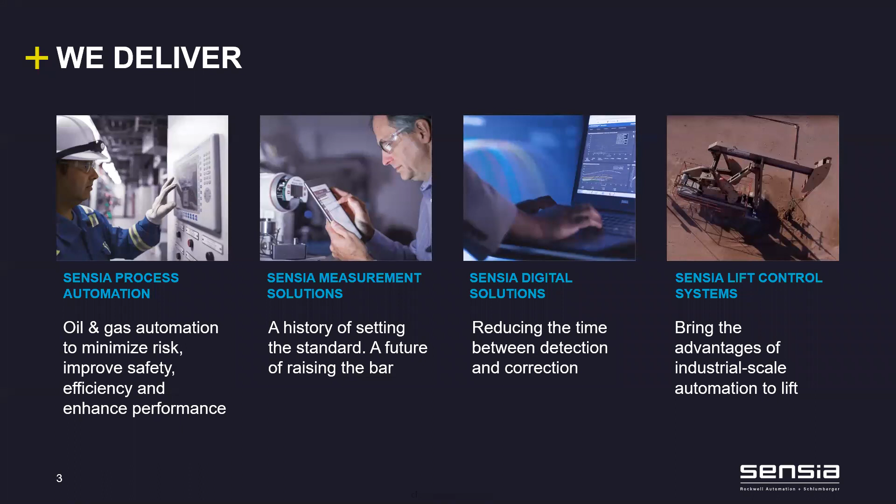So what we are going to cover in today's agenda, which is approximately 60 minutes, but we would try to condense it down to, let's say, 40-45 minutes to take your questions. We'll start with the ESP automation and health management, like how do you know your ESP functionality is going well? So from the electrical signature, we'll take a look initially, and then gradually we'll focus our ESP to prioritize based on those symptoms. It's just like an analogy of a person.

If you go for a diagnostic to a doctor, he first checks your physical attributes, your pathology attributes, and then tries to understand what kind of issue that is, and later on prioritizes. So we'll look at the prioritization. How do we diagnose and prioritize? Then what are the electrical signatures? How can we take the electrical signature of our equipment, not very sophisticated equipment downhole, maybe from the surface, whatever we have, it can be a variable speed drive, it can be a pump frequency or a speed, and how that can lead to an interpretation for event detection.

And gradually we will go to artificial intelligence. Well, predictive model analysis and control action can be taken for that specific ESP in order to avoid failures such as the ESP itself, or gas lock issues, or pump off issues, or maybe some of the sand production issues which you have. And finally, I'll talk a little bit about this new digital twin. It's a fancy word, but we would try to give you some perspective how digital twin can play a very vital role in these AiRP solutions. And finally, we'll take some of your questions and answers.

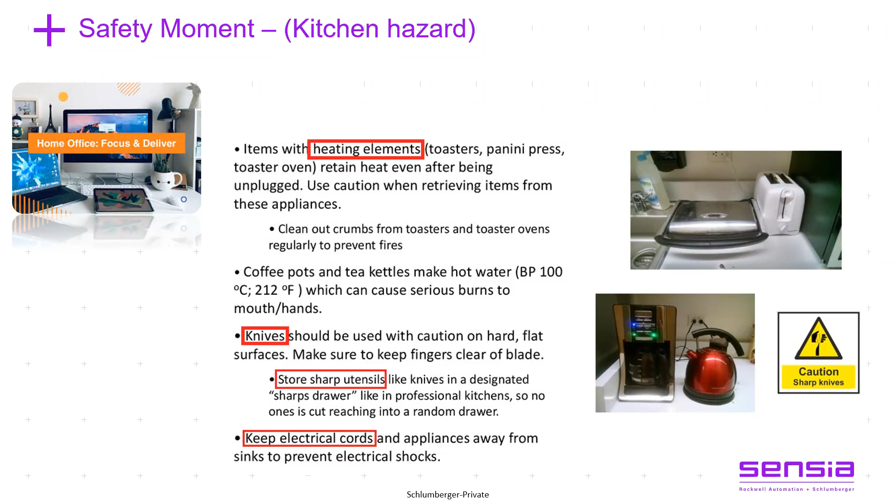And now we will shift our focus to today's topic, which is AiRP for ESP automation and its health management, right? So first of all, what we did is we split into two themes, right? And these themes are based on the electrical signature or automatic event detection. We call it AED. That comes through the equipment itself. And some of those also come from the reservoir or the well behavior, right? So when you go for ESP optimization, you look at the physical piece, which is the equipment, and then you look at the holistic piece, which is your nature, which is the reservoir. So the challenges which we got, the reservoir challenges are basically sand and scale production, and then pump wear and tear.

And the physical challenge on the equipment side is managing the alarms, because in a practical world, when we are running an equipment and that equipment is giving you hundreds and hundreds of alarms, somebody needs to see it, somebody needs to manage it. And more importantly, after seeing and managing, that person should come out with some decision.

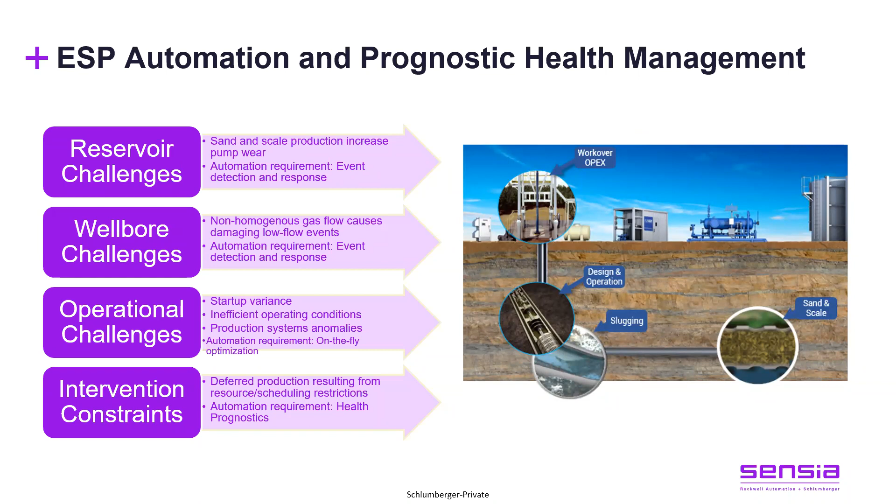I'm giving you a very vague example or a simplified example to make you understand. Then maybe I have, let's say, an increase in temperature and vibration leading to a sand problem. So then the mitigation measure would automatically come to slow down your pump speed. So these are the attributes we get overall from this topic.

Now, let's see how prioritization takes place today, right? In all these ESP wells, including in Indonesia. And then we will see how we can improve from today to tomorrow, right? So today, the ability to prioritize the relative importance of events lies in people, not in a program. And that is where we have a slow loop system, where it is hit or miss because it's run by a field engineer and they can see the event. But as the number of events increases, it is relatively difficult for that field engineer to qualify and quickly take action to be able to protect your ESP and production.

It goes down to a data surveillance center where you have production guys sitting, operation guys sitting, and they would take a look at it, typically 2 to 3 or 4 guys depending on how many wells, and then they decide it. And this is not a very efficient way of doing things, especially in today's time when you really need some intelligence to tell you what are your prioritized wells, because you don't want to focus on 100 wells.

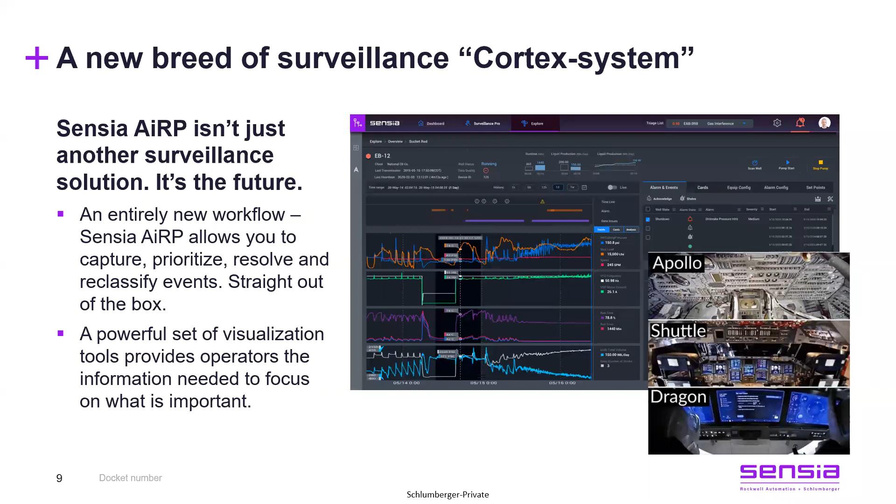And the maintenance of the ESP is also something you need to consider. If your ESP fails, it's not only the ESP cost, but the maintenance cost, the guy who is traveling to the site to replace that—that's also something very important.

So the challenges it addresses is basically production optimization to reduce your expenditure for ESP failure. You can scale up—today you're using 10 ESP, you can easily go all the way up to 1000 ESP, no problem. This system is an absolutely scalable system.

The most important thing is domain expertise. And that is why Schlumberger comes into picture, because you know how much experience Schlumberger has in both the physical piece of ESP as well as the surveillance piece of the ESP.

So that is why with the SCADA system, if you look at it, either it will make or break. Like if anything happens, the SCADA system will shut down. But in ESP, can you afford to shut down? No, because you need to run that to maintain your production. So that is where you cannot use a conventional SCADA system for an exclusive petroleum domain expertise ESP platform like this. So that is why we are different.

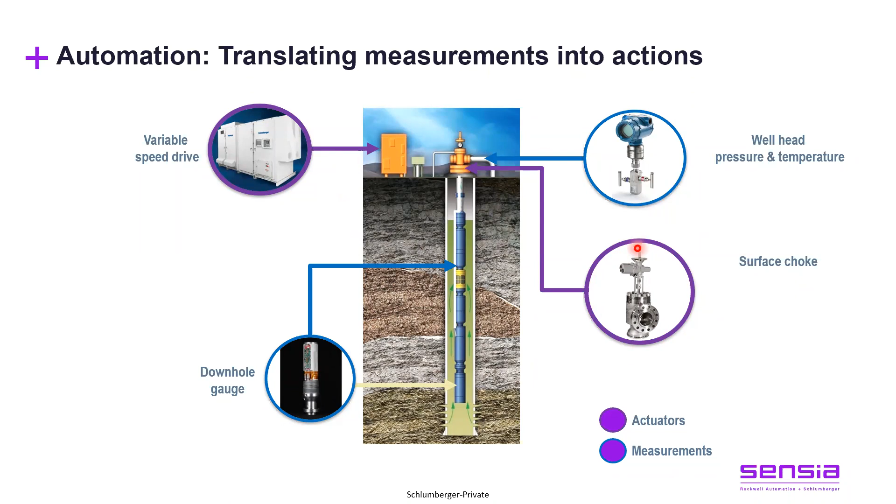Now we'll deep dive into electrical signature analysis, because this is important, how critical electrical signatures are. Believe it or not, these electrical signatures have already been there in the ESP platform for many years, but nobody really took the pain to get this data and make decisions from it. So the AiRP platform actually does this for the first time. What we're doing is performing signal processing in both frequency and time domain. Remember, we have all this data - variable speed drive data, vibration data - all timestamped. So we've done the fast Fourier transform, FFT, a mathematical function, to obtain the signature of interest. You can have multiple signatures: frequency increasing, speed decreasing. But what's important is to obtain the signature of interest and other derived parameters useful for condition monitoring.

Condition monitoring of the process coming out, in this case, can be your hydrocarbon production. Also condition monitoring of the equipment, such as vibration - if the pump is vibrating much, as you can see it increasing, what does it mean? Either it has a throttling impact, or more sand production, or something that's not smooth. So you validate that with the amplitude modulation of the current coming in. If you see there is vibration, and the peak-to-peak voltage is quite significant, you cross-check that back with your current, and you see current drawing up when vibration is increasing, and current dropping once vibration drops. That validates all this happening in the background automatically. Then you detect it and take mitigation measures, and this can be applied to many problems - not just vibration, this could be sand, this could be gas lock.

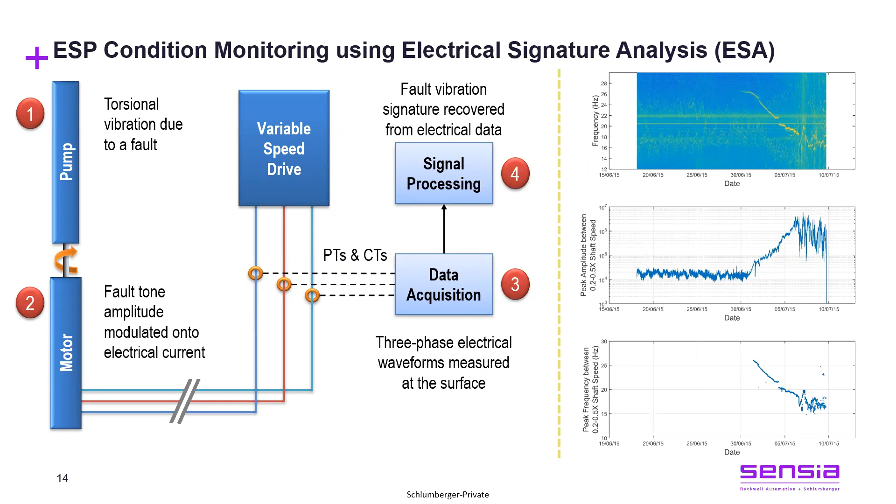Now you detect the event. Now how do you take action? All this is fine. Now you understand, we detect the event, we have so many problems, we know all the problems. What action the system takes, how it can help those guys sitting in the production surveillance and complement them.

The automatic event detection system, or AED engine, begins by considering real-time data from the field. It captures all the real-time data: pump, pressure, temperature, vibration, speed from the VSD, etc. It analyzes whether this is due to bad lubrication, heat rise, or vibration. What makes the system unique is its ability to understand the physical property of the system. Initially, the engine considers the quality of the data which is received.

That quality validation I have shown you in the previous slide. How do you validate there is a vibration? There are multiple checks it is doing to validate that condition. Then the engine can discriminate whether variability is due to transmission noise, because sometimes you might have noise from a three-phase connection. It could have several other issues coming downhole, or physical fluctuations such as gas production.

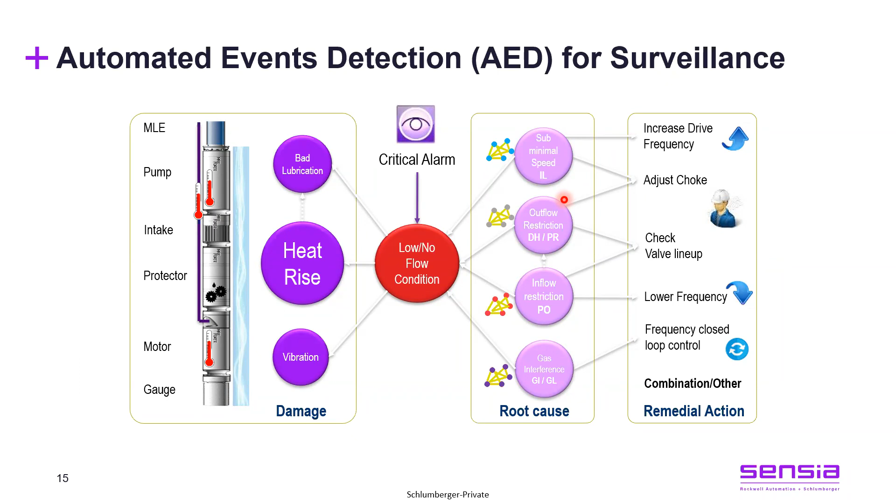It adjusts the choke depending on whether it's a sand issue or a gas lock issue. It checks the valve lineup, or vice versa, as I said, increase or decrease frequency. The remedial action is already there. By the time the guy really comes out for some other action, the system itself avoids the pump failure. So that is the beauty of the automatic event detection system, the action which is taken.

Now we have seen different scenarios. Let's shift our focus to pump off and recovery, right? So applying the previous startup practice, what we do is we ramp up our pump initially, let's say up to 50, 51 hertz, okay? A pump off condition was then raised, right? This is a live example from one of our sites, by the way.

So if you see, we started smoothly and then raised to 51 hertz, and a pump off condition was raised to the system. And then the AED engine detects it. The automation began to take appropriate action to decrease the speed. So if you see, the speed of the pump initially increased and then slowly it is being decreased, to adjust the choke, to close the choke until the severity started dropping.

Eventually that eliminates the event, because if you drop the speed and close the choke, then ultimately you are not running at 51 hertz. Ultimately that is going to come and stabilize. And this is how you actually avoid pump off, which is a very severe cause of your ESP failure. ESP doesn't fail when it's running. ESP often fails once you start up. That is where ESP fails.

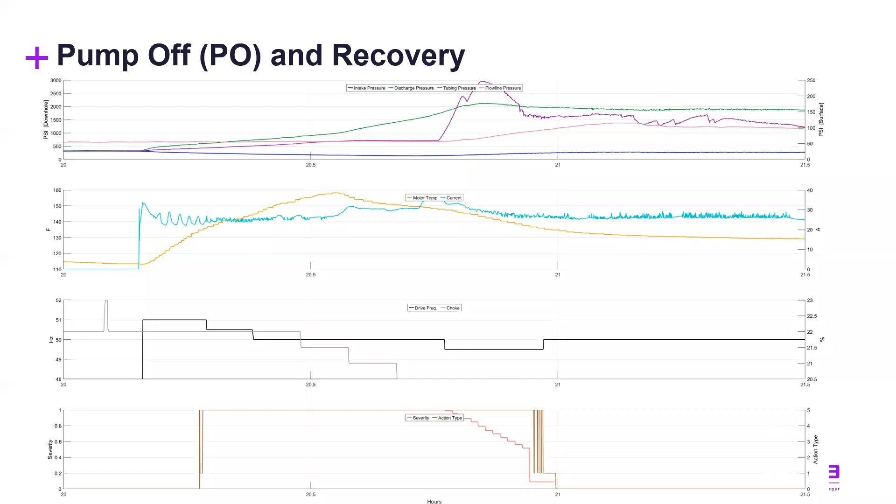Then another issue, insufficient lift. This can happen in low flowing wells, especially depleting wells, low pressure wells, tight reservoirs, sometimes heavy oil. This is a very common cause for those kinds of wells. So how does the engine respond? Let's see. So we are in the process of an action of walk back. What is walk back? It means it takes a small step towards the target set point.

So let's say you have a target production limit, or at this speed, if you run the pump, you have the optimum production. In the process of that, a brief insufficient lift was triggered, and that could be due to the motor temperature. It could be due to various reasons down in the subsurface, right? And the walk back was disabled, followed by the event recovery action. How do you manage that? Either you manage it by increased frequency or by a step.

Now, as you know, there is insufficient lift. Instead of a long wait, or an alarm being triggered and somebody telling you what to do, the system works by itself. So how does it work? First of all, if you see, this is your baseline, the green is the baseline at which you should be producing. And then suddenly you start up and you see your production is not as per the baseline, it is depleting. Ideally, this can create serious issues, from a production perspective, from the pump perspective, and a maintenance perspective.

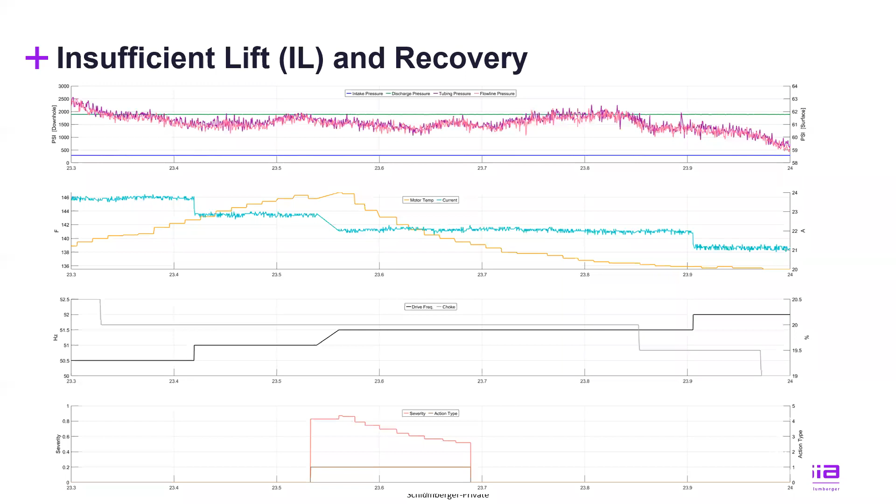So this is the scenario in case of insufficient lift and recovery in a real-time example, the screenshot which was given to me. Startup, which is another highest risk of ESP failure, which we just discussed. Here, two things are very important. Time to detect that startup.

So x-axis is your time in minutes and y-axis is your frequency. The same thing we are checking with choke and the same thing we are checking with current. Remember the data analogy, we don't rely on one set of parameters. We have to cross check with the other set of parameters to make a correlation, right? So what is happening here? How do we avoid a startup failure of an ESP?

So first of all, currently the challenge is it's a very manual process. Okay, we detect and check it and then we react. And that reaction time can vary significantly from 5 minutes, 10 minutes to hours to sometimes several hours, right? So fast reaction time is very important because as you rightly said, ESPs fail during startup the most, 80 to

90%. So we need to detect any anomaly within minutes to avoid ESP failure and potential permanent damage to the ESP, right? Because this is where your permanent magnetic motor gets hit, right? And then surface operation constraints, reservoir related issues, and finally and most importantly, can we devise a startup process that protects both the well and the ESP, because it's not only the ESP, sometimes it's related to the well.

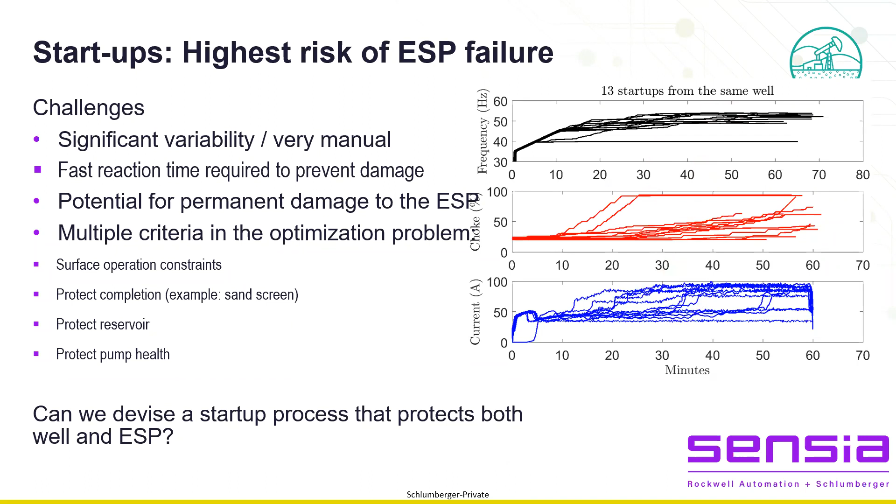Okay, so how do you do that? So first of all, you need to ensure you detect it within a certain time frame. You cannot afford to allow the ESP to run for a certain time and then all of a sudden it fails, right? And then the electrical signature, the harmonics, is coming. So let's take a deep dive into how automation using model prediction can avoid such high risk ESP failure during startup. So this is the model prediction, which we call MPC, model predictive control.

So this is an action coming from the artificial intelligence tool, which is a physics-based model, and it has a combination of a mathematical model as well, right? Which not only predicts, but also gives you control capability to maneuver that dangerous period of startup. Okay, the capability of allowing control to multiple constraints using models such as digital twin. You can apply it to many problems, not only to startup.

So the MPC finds the operational control action from the model, that is a multi-input, multi-output system, which is reinforced by machine learning. So what is happening? Let's take a look into it. So the first curve is the pump speed, and the second curve is for the choke opening. Okay, I have to apologize again for my granular graph. I should have increased the size of the graph.

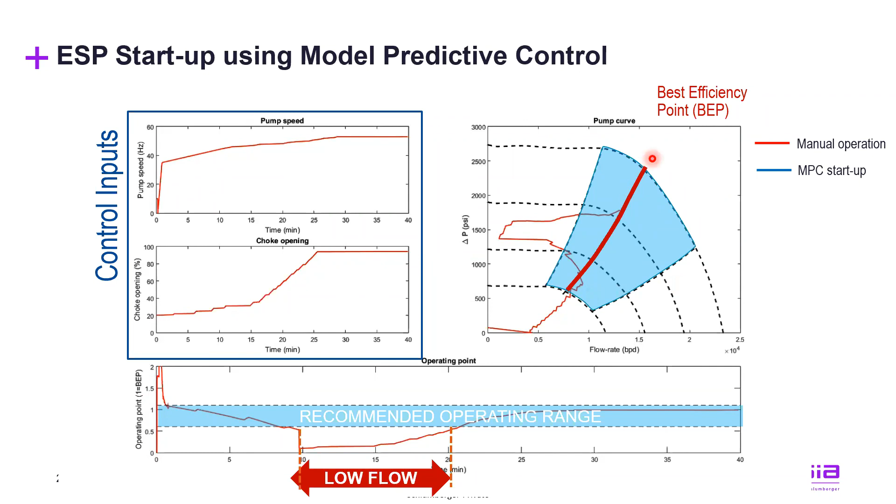Or for any pump manufacturer, you need to have this best efficiency point. So all you do is controlling that action and minimize your pump off situation or your overspeed situation or gas lock situation. That is where the recommended operating range for MPC startup is coming into picture. Whereas for manual, it is virtually impossible to take action within short time, right?

This is again another MPC for ESP startup where you can see it's been stabilizing fast. One of the things is controlling BEP. Another thing is stabilizing fast. The stabilizing fast is achieved because you know all the surface parameters. You could tune your speed and choke to meet it fast. Okay, so in a way you are directing the ESP saying this is where you should be at.

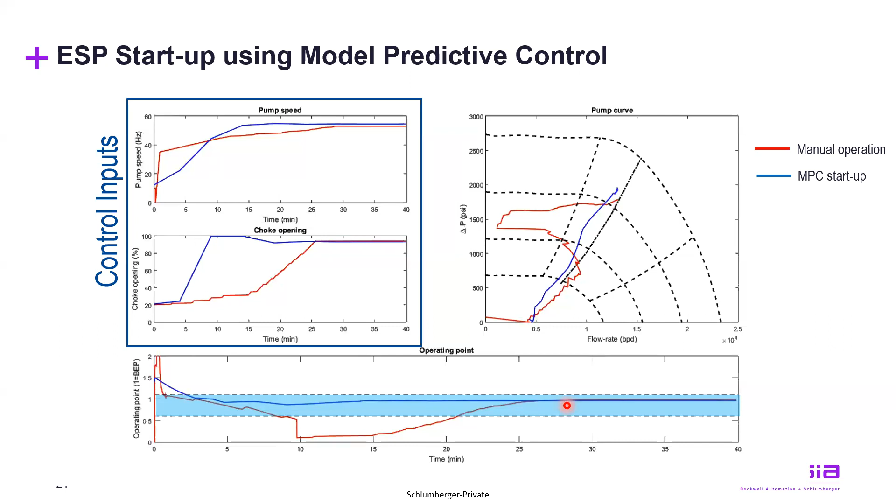Imagine if you don't have any direction, the ESP will behave whatever it wants to be. So in a way, the MPC acts as a target set point for your pump to behave. So that way you could not only achieve your production, but also achieve enhanced pump life. Because if you are not overrunning the pump, if you are not overspeeding the pump, and if you are facing sand issues, gas lock issues, and successfully mitigating that, what you are doing? You are increasing the pump life. If you are increasing the pump life, that is giving you production and also less workover and maintenance.

Now, the KPI can be different to different customers. And believe it or not, many countries have different perspectives. Some countries see electrical power as a major issue. For example, Australia. They see electrical power as very, very critical, to minimize ESP consumption, right? Because availability of power in some of the remote sites is minimal. Some customers see maximizing production as the most important criteria. And some customers, or in fact most customers, would like to protect the ESP from failure, from maintenance, okay?

So the MPC is more than a basic closed loop control. What it does, basically, you can fine tune your preference and the triangle and make it as per your wish. Like if you want the MPC to focus on production, it will focus on production, but at the same time keep an eye on your ESP failures and control performance. If you want to keep an eye on electrical power, it can do that with your own priority.

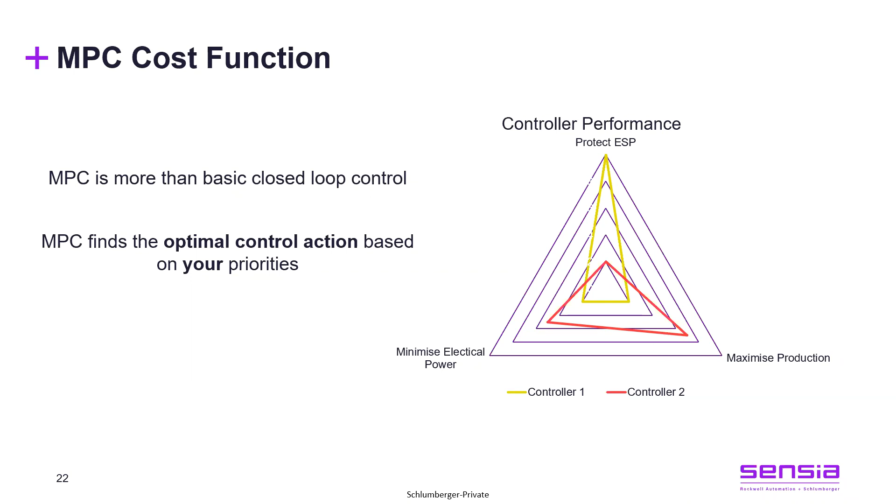It addresses all of those, but you can also, depending on your KPI, production capabilities from certain good wells, vary it accordingly. And that can be done either field-wise, across the asset, or with respect to specific wells. This is one more beautiful thing about the MPC cost function. Now let's see the gas lock situation. I think after this, I have one or two more slides and then we'll take questions.

So the gas lock mitigation measure is also very crucial. Okay, like startup, gas lock can be catastrophic. So the objective here is to develop an algorithm to mitigate the gas lock situation and automatically recover to normal position. That is important. Only detecting and giving alarms doesn't really help in today's time when our workforce is highly changing.

Either they are transferred, organizational changes, training, we can't train them properly, new hires, a change in department, you never know, right? So these systems really complement our customers to bridge those gaps between competency, maintenance, and production. Because if we can't bridge the gap of competency and maintenance, we can't eventually get to those production objectives. So it's very important to understand how this technology is trying to mitigate both the competency issue as well as the maintenance.

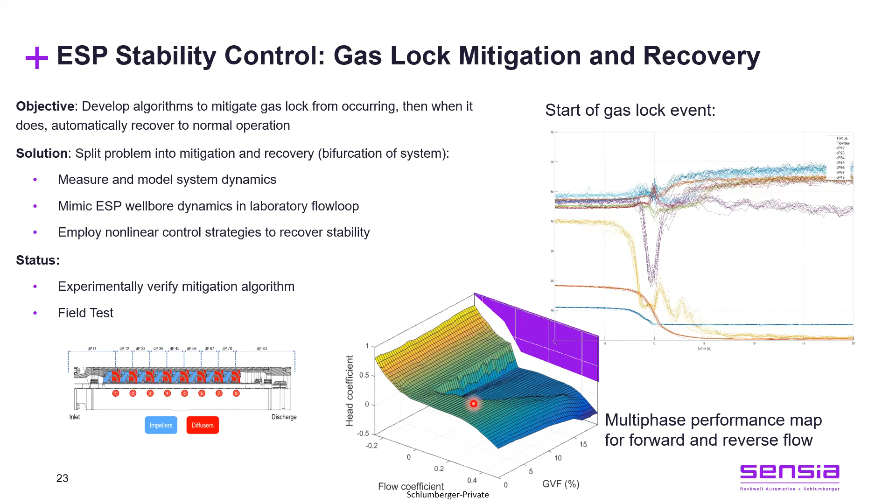And later the engineer can sit down and analyze, okay, this is what has been done. And I think this could be a best practice we can implement for the rest of the wells. And now that becomes a benchmark for all our wells. So this is the way the human and machine or the digital twin can work together to complement each other.

I think I got a couple more slides and then we are good for questions.

So the digital avatar, this is the final picture we want to see. First, we want to take the well configuration and pump configuration from the fixed input. Then we want to take the electrical signature, either it is a water cut or GOR, current, voltage, frequency, vibration, okay? Then that goes to the offline physical model, which in turn, we advance through the machine learning, what you see. So from the DOE, we get into the model predictive control part. And then finally, through the digital avatar, we can take decisive action towards your ESP surveillance system.

And in all these pieces, both the physical parameters of the well and equipment signatures are taken, and also you can interface the Schlumberger petrotechnical connectors such as PipeSim, Olga, Eclipse to make sure all these exercises which we have been doing have a valid business impact to your ESP reduced order model. So let's say if you don't have subsurface, we can use PipeSim, steady state, or maybe Olga, transient analysis, to model that in a digital space.

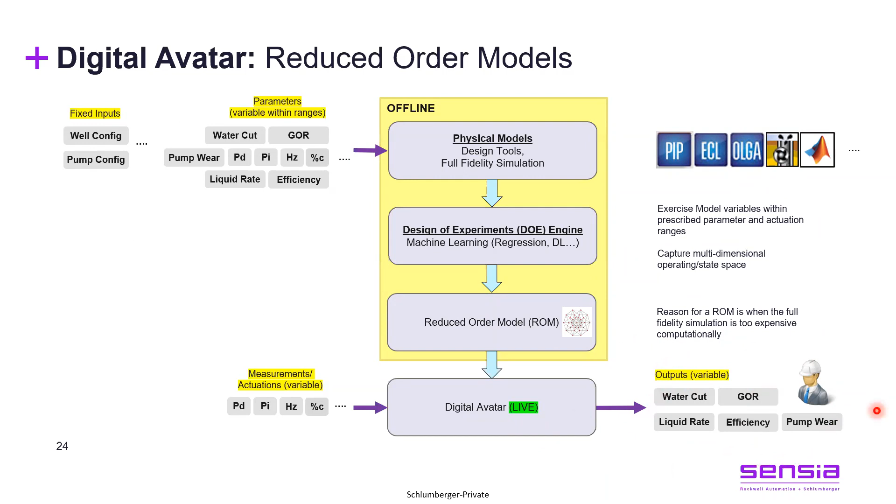Okay, so I think I also need to highlight these critical attributes. So the final attribute could relate to GOR, efficiency, pump wear and tear, where it is right now very difficult to access, right? So this system also addresses those maintenance related capabilities and efficiency of the pump as well. With that, we come to the conclusion.

So, capability for a complex physics-based model defined for a specific scope to be broadly operationalized for automation. It can be applied to many problems, as you can see, right? And mainly the problems could come from various physical properties of the well, as well as issues with the physical pump itself. It provides derived measured output that would not otherwise be measurable, right? This is why this is so important.

It provides the ability to do what-if scenarios. If I could not decrease the speed, what would happen? So those scenarios you can get at the back of the site. Ability to perform auto calibration with external source and measurement. You see the data quality issue, how that has been interpolated, how the gas lock issues have been interpolated. Defined based on model and available input measurements, it can also be a guideline to demonstrate benefits of sensors.

I didn't cover many of the examples, such as virtual flow measurement, which we can do with the same engine. We can do equipment-based model conditioning, monitoring, failure prediction. Of course, we covered that briefly, but there is much more to it. Also, gas lift and rod pump we can do in this.

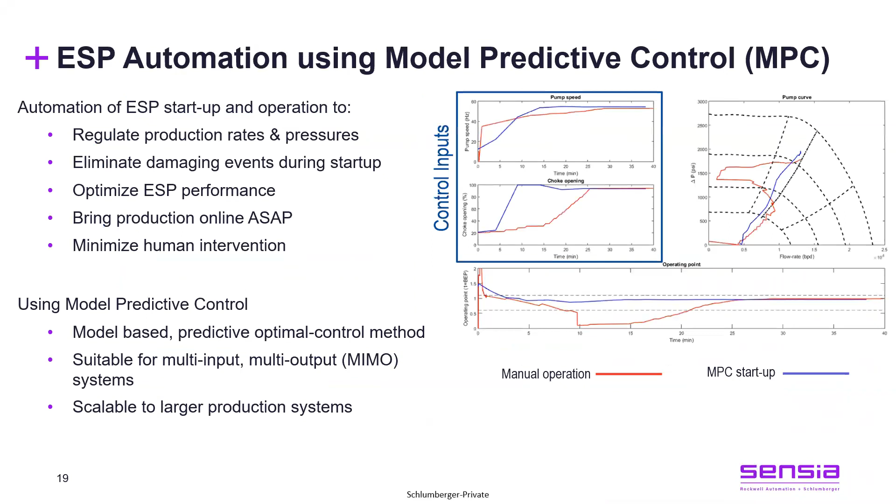First of all, thank you, because you have really asked an infrastructural domain question. This is a surveillance platform. As we discussed in the beginning, this can be run either on the cloud or on-prem. The way it communicates between the site and the platform is based on either standard radio communication, satellite communication, or a GPRS or GSM modem. That is standard. In Indonesia on land, most of them are already there. Offshore could be with satellite.

So to answer your question, we either provide an edge RTU at the well pad or an IoT device, which can take all this data, both the wellbore data and the equipment data such as VSD and pump data, downhole and surface. Then that IoT gateway will ingest that data to the cloud, or if not cloud, then through the communication channel we just discussed it will come to a workstation or a server, which can be in your petrotechnical domain or a SCADA domain server on-prem installation, and the system works. So the most important thing here is the data backfilling.

So this surveillance system runs on a connected production platform, the AiRP, which is now known as Omni Surveillance System. What it does is the IoT gateway, which we install at the well pad, pushes this data to connected production, or the AiRP system, using a protocol called MQTT, or Message Queuing Telemetry Transport.

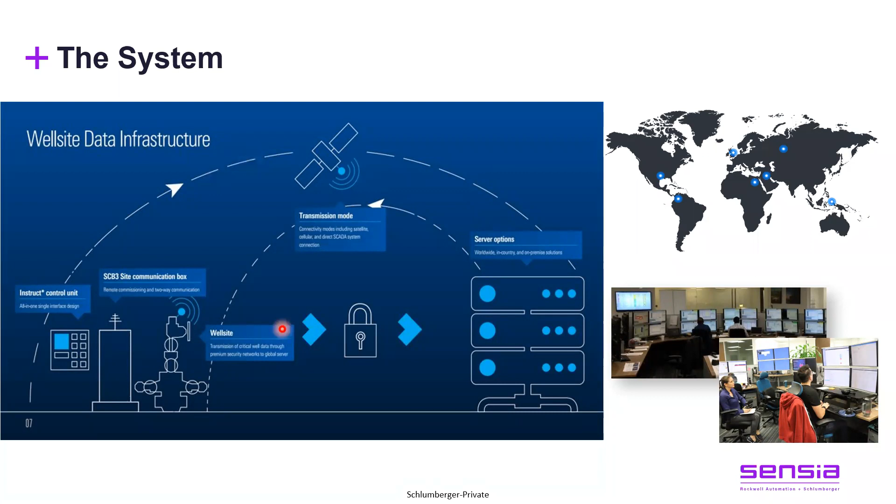Okay, so if you see the diagnostic which we are taking from the equipment and the well level, these are predominantly electrical signature and surface equipment health and operational parameters. So if you look at the transformer information, that could not be a direct information. It could be indirect information, meaning if you have issues with the transformer, then eventually you will see the anomaly in the power quality, right?

So to answer your question, we may not take a direct transformer exclusive input, but the byproduct of a transformer such as current, voltage, frequency, harmonics, we do take care of. And that is where the total harmonics distortion, or THD, comes into play, where we continuously monitor the distortion which is coming from the transformer, right? So hope this answers your question, right?

Yeah, because in my experience in the past, when we make VSD, we have to set the transformer with the width of range of the VSD as well, just following how far the VSD can set and go. Yeah, correct. So this is the THD coming from that.

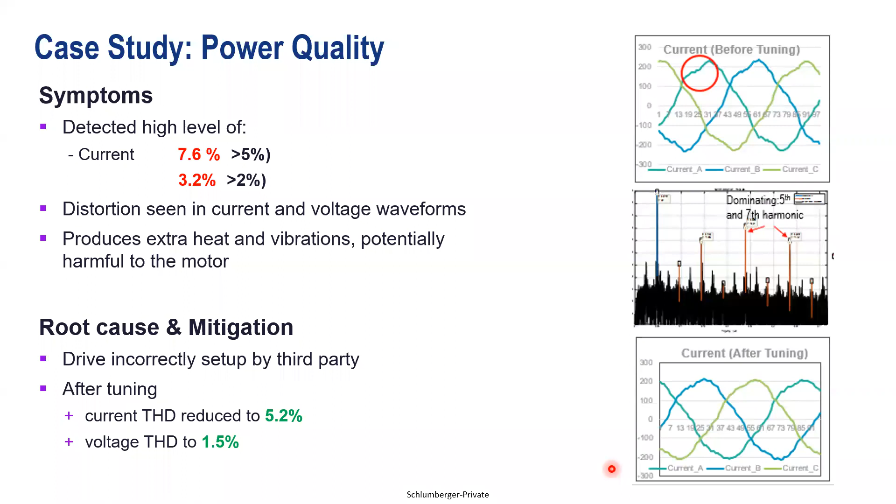I think it is an exciting presentation. And I hope this can be implemented in our field, because you know that ESP, there are many fields that we have ESP for artificial lift. And later on, I think the next session about SRP and PCP and other artificial lift will be very good to share with us. And then I want to underline here that the ESP that we install in this field has to be installed with the sensor, right, Mishra?

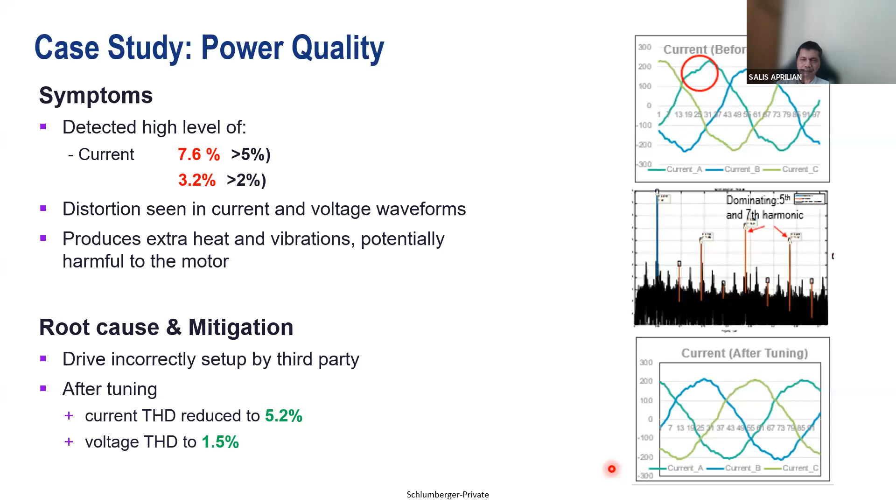The sensor, not all the ESP that we can take as automation, but we have to put the sensor either in the ESP itself, in the flow line, and until the production line, to control the production and optimize this system.

When I present this in SPE, I also talk about what I call IPMOS, the Intelligent Production Monitoring and Optimization System. So not only monitor, but optimize the production. And this is a different kind of tool that provides very good monitoring and also optimization from the ESP, from artificial lift. And later on, we will learn about SRP and PCP.

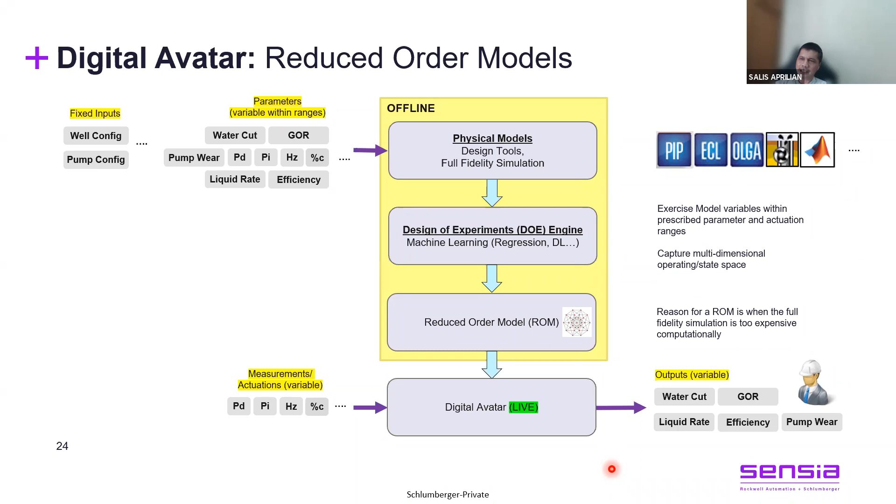Again, thank you for sharing this new technology for digital. And I believe this will be more and more familiar with our engineers, not to replace engineers, but to complement these tools. So engineers will find it easier to analyze and focus on the root cause and what we need to optimize. I think that's the ultimate goal of these kinds of tools, because the technology is only a tool, but behind that, people are still important to analyze and make decisions. So thank you so much for collaborating, even from IATMI and IAGI and ISPG, and thank you so much to the speaker. Have a good day.

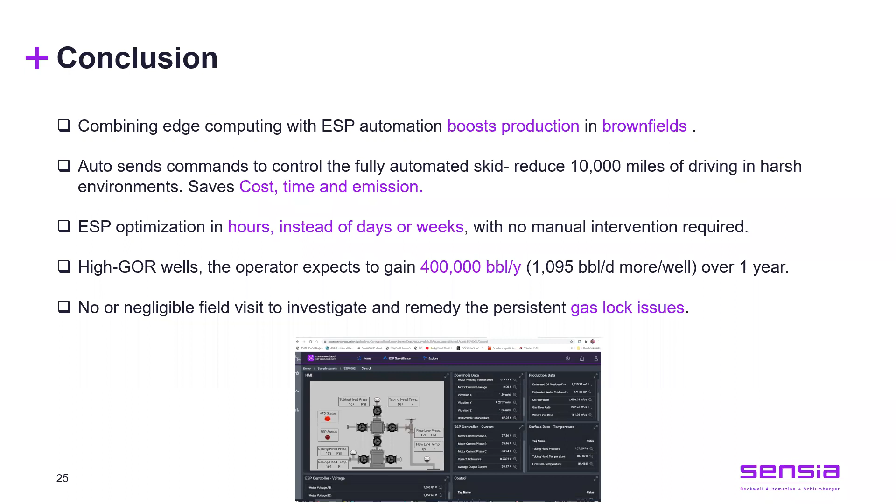Okay, I think that's it from our side, sir. All right, good, very good.